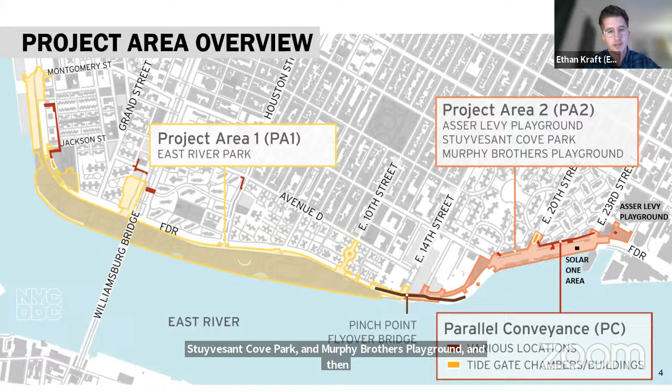Yes, we can. Alrighty. So tonight, just an overview, we are going to go through our PA1 and PA2 construction updates, and then we'll spend a little bit more time on parallel conveyance because that's the bulk of what's happening up in CB6. So just to give an overview again of ESCR, these are our 3 contracts under ESCR. Project Area 1 is the bulk of the landmass of the project. That's mostly East River Park. In Project Area 2, we have Asser Levy Playground, Stuyvesant Cove Park, and Murphy Brothers Playground. And then parallel conveyance is sort of spread all throughout the city, or all throughout this the east side. Just to go through some of the work that's happening on each of these contracts, in Project Area 1, again, that's mostly East River Park. We have a few closures in the park.

A couple weekends ago, on October 20th, we installed the Corlears Hook pedestrian bridge over the FDR Drive, and we have some pictures of that in a slide or two.

There's also ongoing utility work. We're continuing to fill the park in the portions that are closed, and we've opened ball fields 1 and 2. We continue to work on the Phase 1 Esplanade, as well as amphitheater seating and the tennis and basketball courts just north of the Williamsburg Bridge.

In Project Area 2, nearly everything is open. Murphy Brothers opened just a couple weeks ago, and we have some photos from that. It was nice to see a few members of CB6 there at that event. And all of our flood wall and floodgates are complete in Project Area 2.

Turning to parallel conveyance, this is spread all over the place. In Corlears Hook Park and Water Street, we're doing utility relocations and sewer installation. Water Street remains closed; we expect that to open mid-November. At East Houston and Delancey, there's more utility relocations as well as test piles, and Con Ed gas and steam work. Up in the CB6 area, we have utility relocations in both locations, as well as Con Ed steam work and ongoing test piles. I'll get into those things in more specific detail in just a little bit.

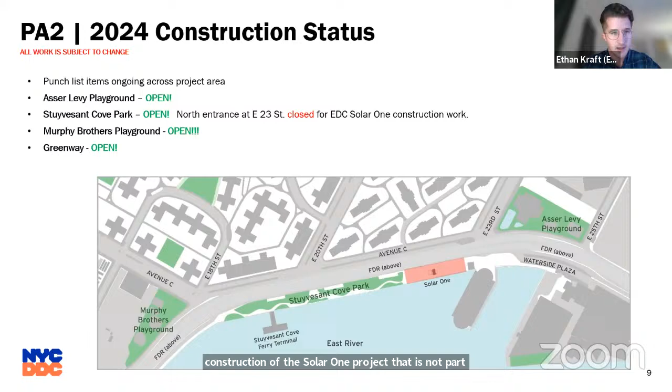In Project Area 2, this is just a map of the area. Everything is open pretty much. We still have some construction of the Solar One project, which is not part of ESCR, but it is taking up a portion of Sty Cove Park.

Murphy Brothers Playground opened to the public in October, and it's a really nice playground with lots of new equipment, new ball fields, dog runs, and basketball courts. Planting is expected to get underway for that park to add some greenery here in November.

The ribbon cutting and floodgate demonstration happened just a few weeks ago with the mayor. It was great to see folks from CB6 there and see the floodgates in action. It was my first time seeing it, so that was a very cool event.

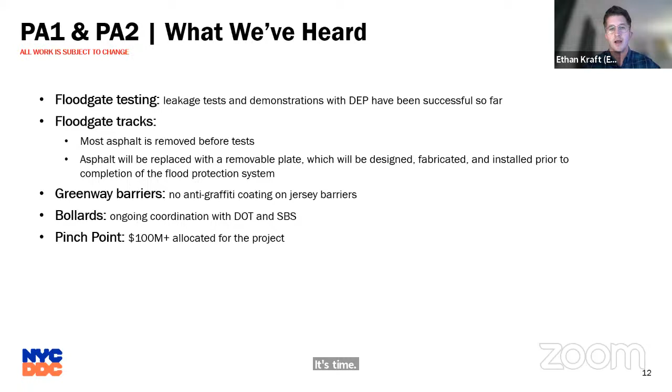Last time we had a few questions, particularly around PA2, so we have a few answers. We've heard that the floodgate testing is going very well with the Department of Environmental Protection, which will be the agency that operates the floodgates. I have more on that in a moment.

Within the tracks where the roller gates roll, sort of like a train, most of the asphalt for those tests is removed beforehand, and any pebbles or debris that remains get compressed into the gates because they're so heavy. Eventually, the asphalt system will be replaced with a removable plate, which will be designed, fabricated, and installed prior to the completion of the entire flood protection system, including PA1 and parallel conveyance.

In terms of the anti-graffiti coating on Jersey barriers, there is none along the Greenway, on the west side of the bike path as you're going north.

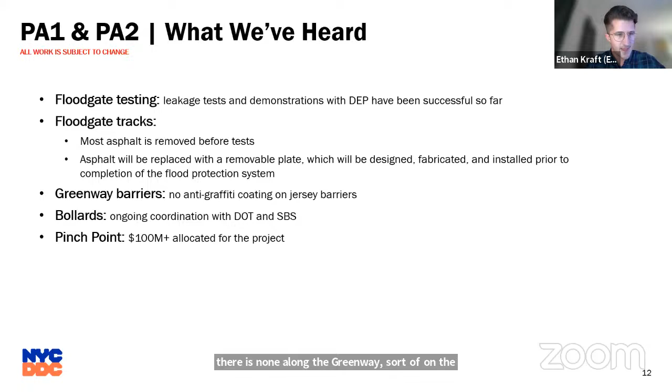And then the bollards — we were just looking at it today. We're coordinating with DOT and SBS to determine where bollards are going in the bike path, specifically near the gas station. I know there was some concern about cars driving in the bike path, so we're in touch with both DOT and SBS about that.

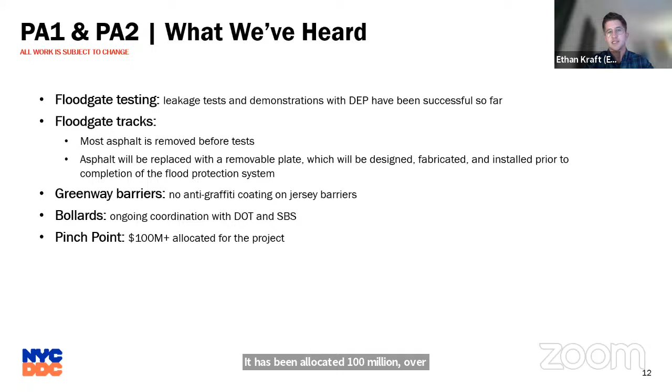There was also a funding question for the Pinch Point project. It has been allocated over $100 million, and I know DDC is hoping for procurement to begin in the months ahead.

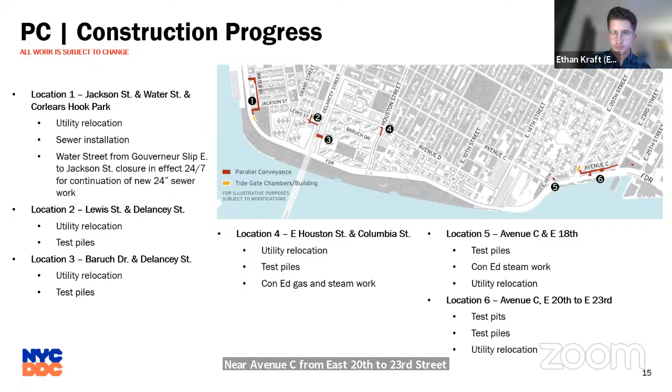So just to share a little bit more about the test pile work, we expect that to go on for approximately 4 more weeks. As they are installing the test piles into the ground, that can be a very noisy and dusty activity, so that is expected to wrap up in about a month. That's just the installation before they actually test the piles themselves. But the full operation from installation to testing is expected to take 4 more weeks.

There will be some weekend work at East 18th and Avenue C. We know that last time there were some concerns about East 18th being sort of a tricky intersection. We do have a flagger on site, and as work picks up there, the team will get traffic enforcement agents involved if necessary.

That test pile work is testing the strength. It's used to determine the capacity of the piles before they install permanent piles, which will be used to support the underground stormwater and drainage infrastructure. And that very deep and heavy sewer work is expected to begin in 2025. As we get a clearer view of that timeline, we will happily bring it back to CB6.

Just what we've heard for this contract, we got a lot of questions about the chamber building at the last meeting. The building itself will house just the controls for the gate and the chamber. The chamber itself will be accessed via a manhole or hatches that are mostly in the street. So 2 separate entrances for 2 separate things.

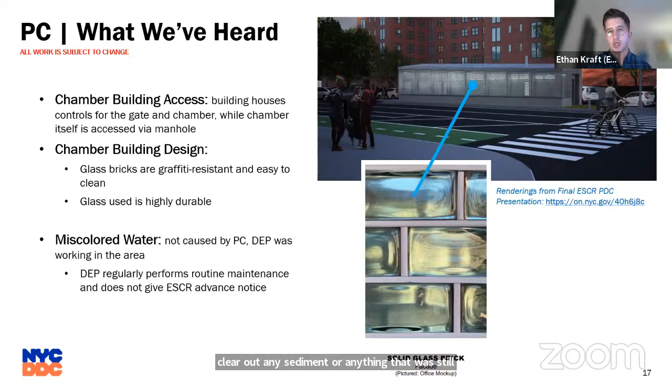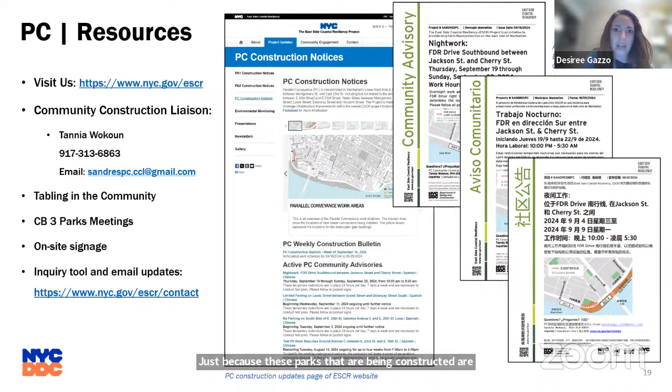I'll say that Luke Alicia from the Parks Department spoke at the CAG meeting and said some great things. One was that just because these parks are being constructed to the design approved for the East Side Coastal Resiliency Project, it doesn't mean that's the final design or the final way they'll be forever. He said there's flexibility with the Parks Department - they see how parks operate and how the community uses them. As times change, people use parks differently, so if there's a new need the community is experiencing, the Parks Department will work with the community on that.

I don't recollect if this was let under a design-build contract. Was it? No, it wasn't. So you had no part of the design, you're only doing the building. Correct.

The $100 million that's been appropriated for the pinch point - do we have any vision as to how that's going to be resolved? Any early vision? DDC is responsible for that project. It's a separate project, and they hope to come to the community, I think early next year. Any thought given to having that be a design-build contract? I'd have to have someone from DDC speak on that, so we can bring that question back to them, because that's a separate project.

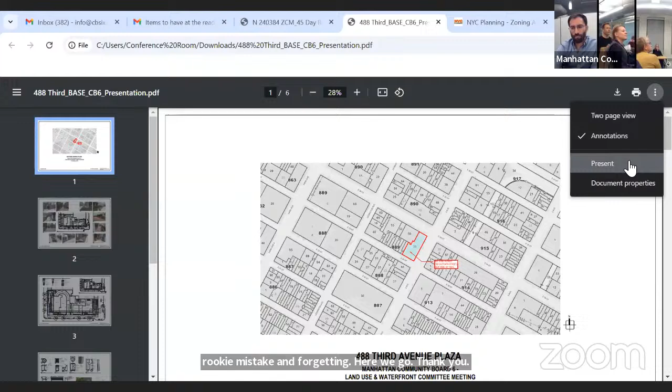There we go. We were basically wrapping up and saying that we're looking to make improvements to this space: improve the pedestrian access and circulation through the plaza, enhance the landscaping and seating, as well as provide for a new open air cafe design. I think from here, I'll let Carla take it and get into the details of the design.

Hi, so yeah, this plaza is located on 3rd Avenue between 34th Street to the north end and 33rd Street to the south end.

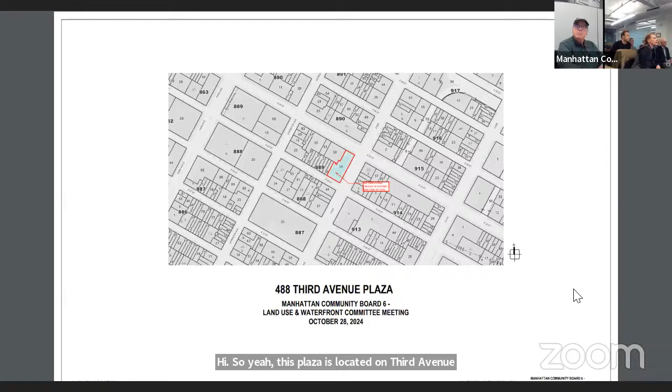If you want to flip to the next page, we can look at some existing condition photos. So this plan is showing Third Avenue on the bottom of the page. And if you go around starting at A, you can see that's the 33rd Street side. These photos were actually taken a couple of years ago. We've been in the process of doing this for a while, but it's kind of been a big eyesore on that block. It's gone through iterations of being empty, having COVID sheds, having lots of chairs and garbage and stuff. So that space on 33rd Street is kind of the reason we started going through this process. And you'll see in the design, a portion of that is going to become part of an approved cafe.

As you come around Third Avenue, it's a very tricky plaza. It's not a typical plaza. It's about 22 feet wide at the top of 33rd. As you head west, it gets narrower by the restaurant. And then once you hit Third Avenue, it's only about 10 feet wide. And we have grade changes going on, so it's a long period. When you're walking on the sidewalk, it seems flat, but it's actually inclining. So as you're going towards the west on 33rd, it's getting more sunken, and same as you're going north on Third Avenue, it's getting more sunken as well. So it's really narrow, there's existing brick planters that are very narrow, with some small openings.

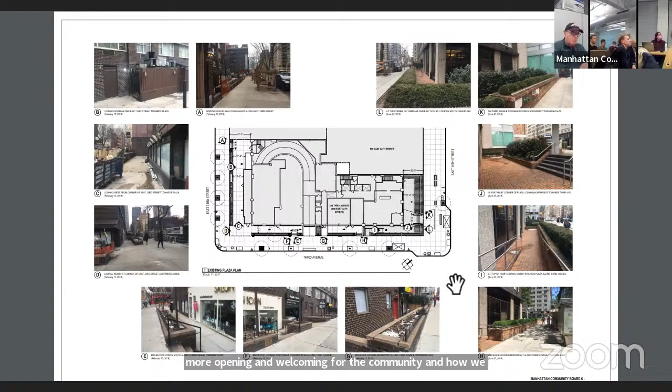So we can go to the next slide. There we go. I think back one. Which one? Maybe back two, I think. Too fast. There we go, whoa, we went the other direction. It's just taking time to catch up. There we go. No, you had one more. I think, hold it. It's taking a while to load.

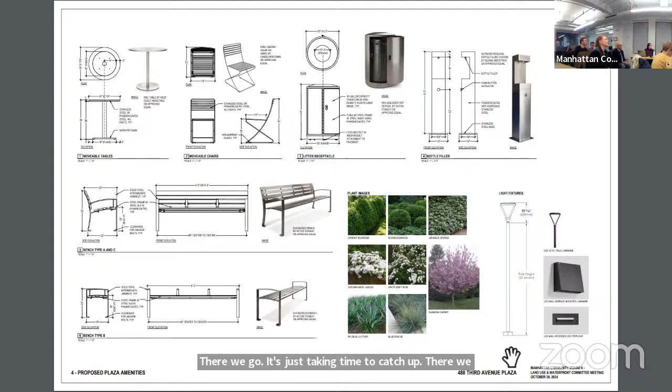Don't press it, okay. So this plan kind of has some arrows on it that show access paths and stuff that we're doing for requirements. So that's what the purple is that you see.

But basically what we're doing here is the corner of Third Avenue and 33rd Street. There's these two sections that are in blue rectangles. That is the designated cafe area, and that will have striping on the ground, the chairs and all the restaurant stuff stays within those two corners. There's certain regulations, it can't be more than a third of the frontage, all these sorts of things. We definitely worked with DCP to make sure it worked with the current plaza. And then that allowed us to make the west end of 33rd Street this pocket park that we're trying to do.

So the existing plan is in the upper right-hand corner. You may see there's a tiny staircase that comes down currently at the upper west side of East 33rd Street, 5 feet wide. We're making it 9 feet wide, and adding 2 other staircases as well. Again, we're dealing with grade changes, so we want to be careful. We have 1 step, then we break it and have 2 steps, so we're not having risers that change very quickly over one run.

We really try to open it up to the public. We put in all sorts of seating there: back seating, backless seating, bench seating, movable seating. We're putting in a bottle filler, a couple trash receptacles, and we're actually creating a big planting bed as well. One of the challenges is we have lots of skinny planting areas that don't give us enough room for trees, so this was an area where we could put enough soil depth and height to give a nice tree planting.

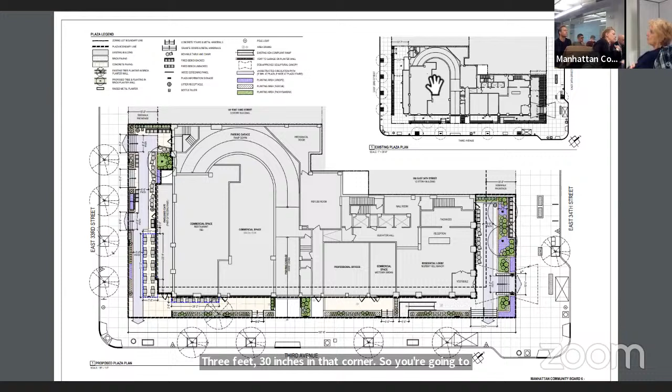Back to 34th Street, we are adding another entrance there. Instead of having that corner step that originally was there, which was a little unsafe, we're keeping the corner but keeping it low. One thing we're doing is getting rid of the high brick walls currently there, making it flush with the sidewalk up above, about 3 feet, 30 inches, in that corner. So you're gonna be up on the sidewalk, see planting, and it's gonna go down — a lot more visually connected into that portion of the plaza than currently.

We're gonna have a big wide open staircase added right there on 3rd Avenue. We're getting rid of the hedges in the planting bed on the 34th Street side and instead doing trees, so you'll have low planting now and trees you're looking through and under. We're adding benches up on the sidewalk level as well, movable seating and a bench. We're really trying to make it feel more like a plaza, because currently you'd never know it's a plaza — just part of it is the design from when it was done, but we're trying to do these things to make it nicer.

So you can go to the next page. I'm just showing some of the amenities, some of the different types of seating, some of the plantings.

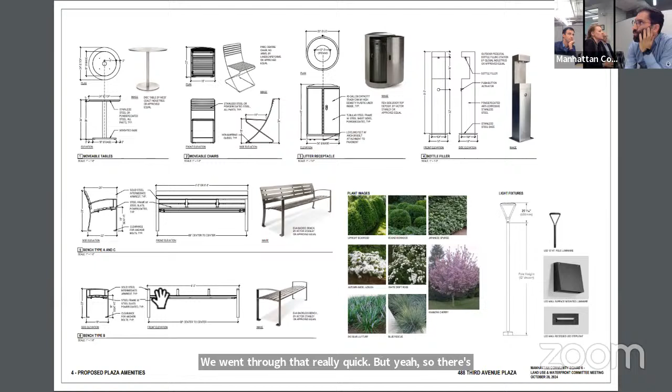We went through that really quick, but there's some plantings, a lot of evergreens, some grasses that are tidy and will kind of look evergreen as well, some roses and azaleas to give us some color.

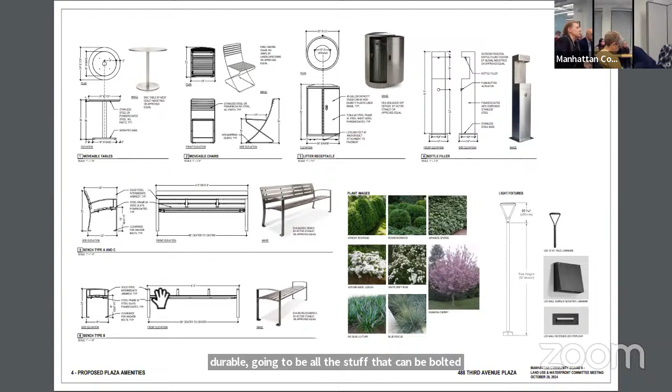And we've got a bottle filler, a trash receptacle, all furniture that's very durable. Anything that can be bolted down will be bolted down. The movable tables and chairs will be taken care of by the owner or the cafe proprietor.

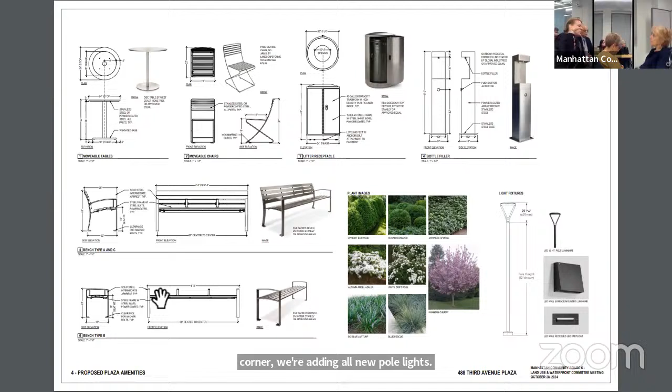And we're doing lighting. We're adding a lot of lighting to the plaza, you can see in the bottom right hand corner. We're adding all new pole lights that shine down. We have to be careful because we have our first floor of the building there, so we're very careful about not going too high. But we're adding a lot more lighting to the building: wall lighting, step lighting.

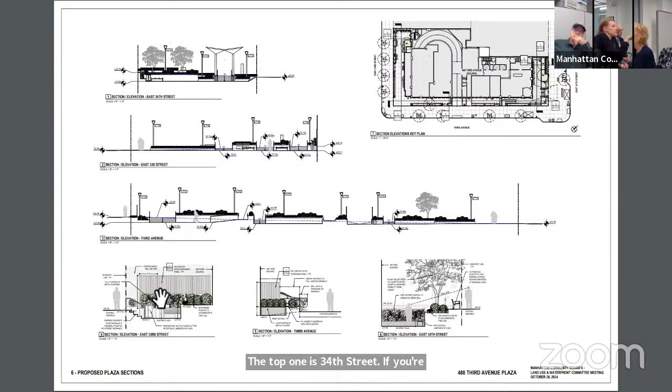There's one more page with section cuts through the property and a couple of details. The top one is 34th Street. If you're standing in the building itself looking at the streets, you can see the stairs going up and the plantings there, the lollipop trees and the low plantings. That's the backs of the benches on the street. So it's a lot more visual to the street than it was before.

The second section down is through 33rd Street. So this is the cafe side.

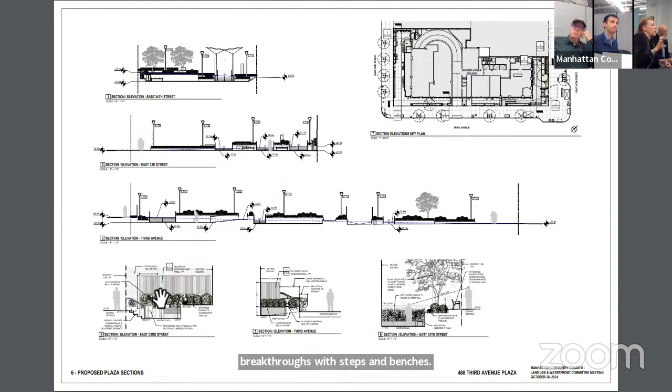So that whole area off to the left-hand side is where the cafe is going to be, and the right-hand side is where we're creating all these breakthroughs with steps and benches. And then the third one down is 3rd Avenue, just the whole long section of that with all the new plantings and light poles and things we're putting in.

And then just a couple of details of some of the new stairs and screening from the garage that goes in the block and all that sort of thing. So that's what we have.

I'd just like to say one thing on behalf of the owner: this has been a wonderful building for us at one level. It's a very successful residential building and we're very proud of it. It has unique characteristics brought up by the shape, because it's not a plaza, the building sits in the middle of a big open space where people build something around it, and we have a few of those, but this is kind of like a strip around the building, and it has a lot of people standing at 34th Street because of the bus and transportation.

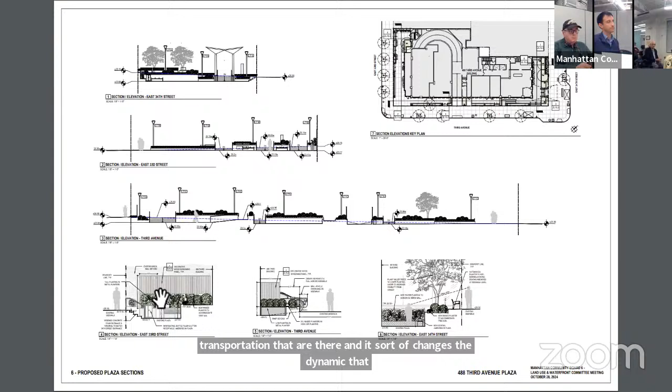They're there, and it sort of changes the dynamic so that the little benches became really big sitting areas for everybody rather than a planting. So we tried to design it to make it usable again as a sitting area, at the same time not someplace where people just sit around for whatever reason.

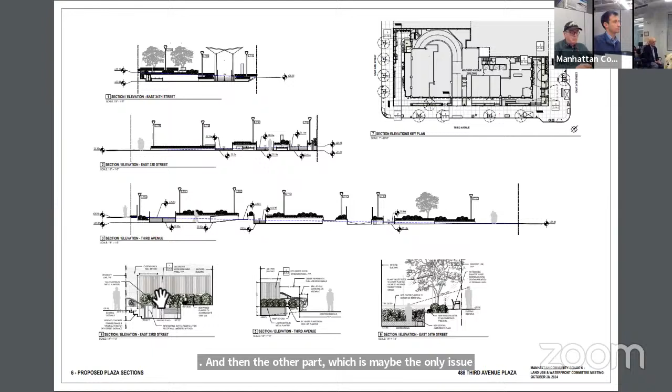And then the other part, which is maybe the only issue we've ever had with this building, is the southern part of the site, which is always to be a retail space, and it's been a restaurant almost since the day the building was built. And it's the kind of thing that's very hard for the building if we don't have a retail tenant.

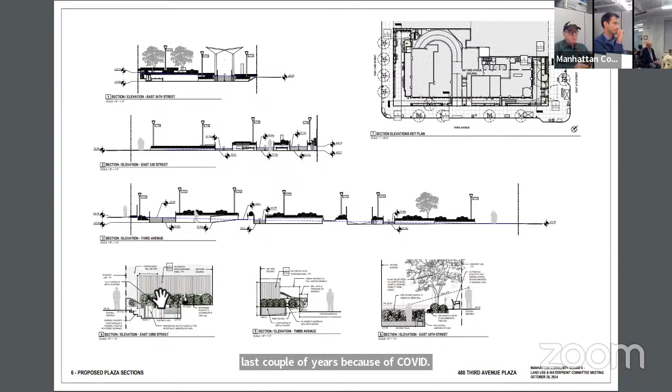We've actually had very successful retail tenants. Some of them have done it well, and some of them haven't done it so well. And this has been kind of frustrating in the last couple of years because of COVID. Real estate things have changed dramatically, especially for restaurants. And then our issue here of trying to keep it active, and COVID has stopped everything.

So what we couldn't do in the regular situation, meaning eating on the plaza - if people who've looked at this corner could remember, there was a tent not only over the plaza, but into the street as well. So it was a very successful restaurant, but I'm not so sure it was so successful all around, you know.

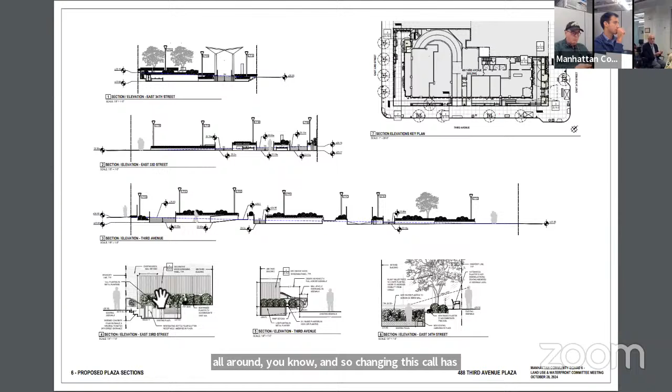And so changing this, Carl has done a terrific job taking something that's kind of really not seen as a positive thing and making it positive with the lighting and adding the seats and the color, and trying to make it so we have access on the plaza while conforming to the rules. This building was built before all of the regulations, and so what was good then - the idea was to make it with a little greenery around it - and then lots of things changed.

In the last 2 years, we were working with city planning, had to stop for COVID, and they were wonderful to work with and very creative. And Carl, I think we're very happy with what she did. Hopefully the community will see it as an asset.

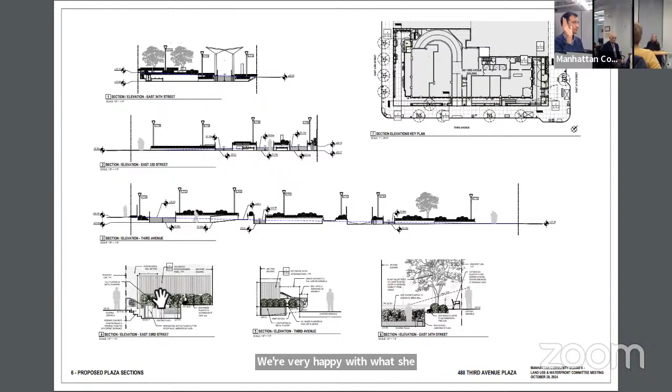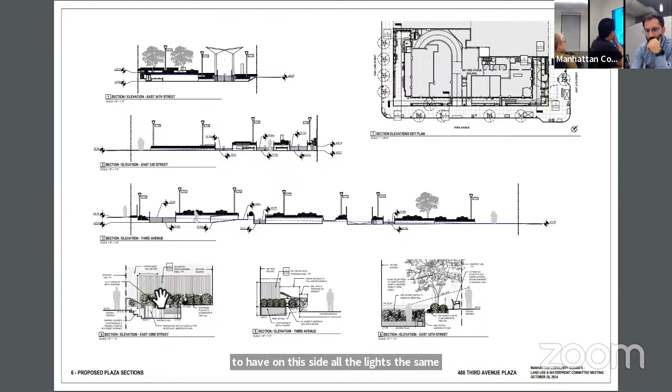It's a nice project. I only have one suggestion. You were commenting about the lights and the height of the lights. I would suggest, modestly, not to interject in the project, but to have on this side all the lights the same height, so the floor has the same impact. I don't know if that's possible, but that's one question.

That's what we have. Well, you can see the elevation. It's this one higher - higher, this is higher. Oh, because the ground goes up. Oh yes, yeah, they are different heights.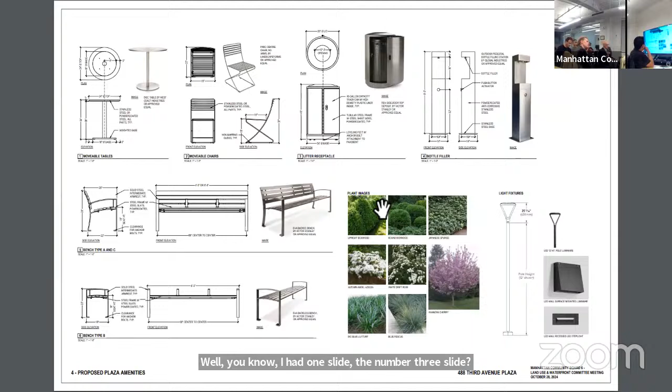And one other question I wanted to ask you: how is this not going to permeate the restaurant to the other? Well, if you go back to one slide, number 3 slide, yeah, the overall plan. Right? Okay, this is kind of - I know it. Okay, and got everything's okay, I just say. I got it. But this is...

The restaurant, the blue area. Blue area is specifically the restaurant area. And what we show here is just basically a sitting area, theoretical, because that's not the way it is, but they have an area so they can do it - 4 people at one table rather than 2 on each side. And what we have to do is provide access.

So the way it is now, it's a dead end. You come in here, and then there's a stair over here. It's just a big, long, dark space. I think this will help the issue, because frankly, the only issue we ever really had here has been homeless, and if there's nobody using the space, it just fills up with people.

So we have exit, entrance, and then these are public seats. As Carla was saying, this is sort of like a park where people could sit. And this is where the restaurant is, right in front of it. It would permeate them.

So this whole blue path that I see here — not the path, that's — this is all public. This is all public. And all here is public with a ramp.

When we talked about this originally, it was a little hard, because there were just stairs going from this side to that side and down. It was very inaccessible, but also very dangerous. So to simplify it — and this building, because of the challenge of the lower and higher levels — we had Richard Datner design a magnificent entrance.

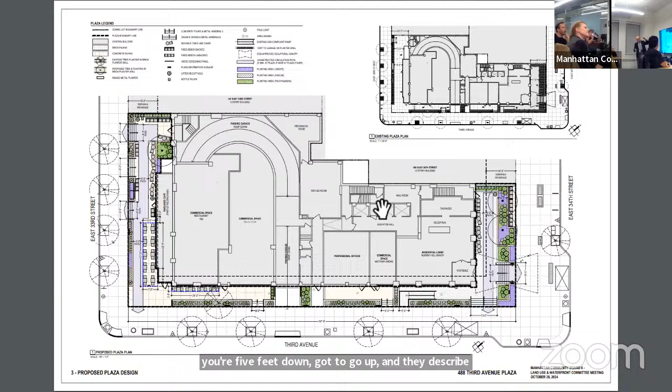I don't know if people like it. I thought it was one of the most creative things I've ever seen, actually. Because the POPS regulations consider a residential building on the same level as the plaza, so you make a canopy over the plaza. Here you're 5 feet down, you've got to go up, and the code describes that the highest end of the entrance is like at the second floor level — you can't really do that with this, so it works better.

How is the restaurant area delineated from the public area? Will there be a barrier? There's a painted line on the ground per the box line. The restaurant is signing an agreement — that's also the issue right now, until we have this agreement, we can have it so that we have it the way we'd like it as owners, and people would like to see it, and at the same time it'll be the law, so it'll be enforced. So that this part is their part of the restaurant — it's clear, that's the way it is.

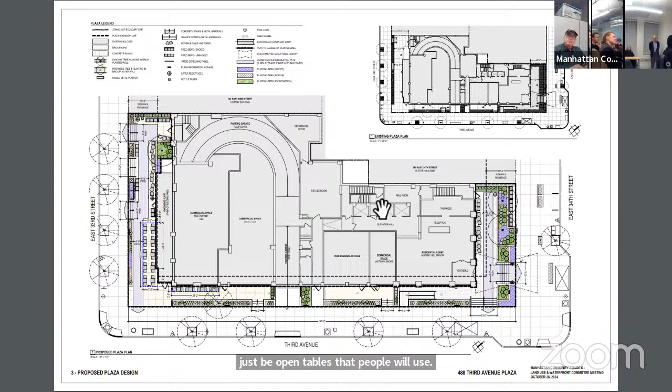There'll be place settings on the tables, whereas the other tables will just be open tables that people will use — just tables, no trash or anything from the restaurant on that side. Right now this is because the emergency egress is here, so it's kind of like the back of the building, but making it open space — the idea is not to have anything back there. It stays inside until the cleanup people come.

So can I ask a question — what is the number of seats? How many seating opportunities are there for the public in your entire plan? We don't do it by individual seats — there's 80 linear feet of seating, which is about 40 seats, which is 40 more seats than there currently is. We were balancing a bunch of things, like how many obstructions we can have in this plaza. So it was a balance of how much seating we can get in and still have our access around, and all these sorts of things.

I'm wondering, how come you're not activating, especially these areas in blue on the corner, and even the area in yellow just south of this, on Third Avenue? James, can you point out — right there, their access — how come those are not used for seating, knowing that in the past few years you guys had a number of DOB violations for using more than your allowable space for the cafe?

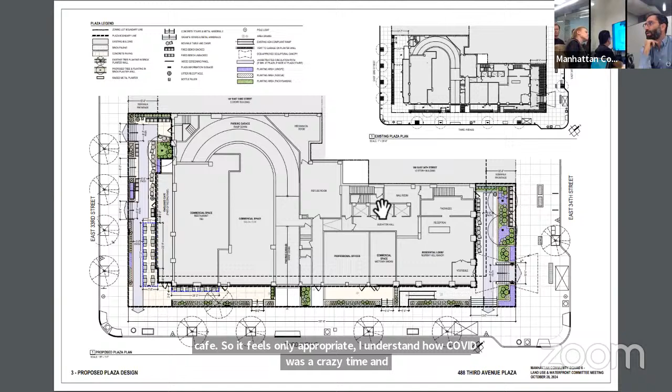So it feels only appropriate — I understand COVID was a crazy time, and I know from my own building it's not easy to operate a cafe. But now that you are fixing that, and it's very exciting, why are you not trying to maximize how much seating you can put in there? The purple areas are planting on that corner. Yeah, but they're not required — you chose to make them planting. No, we actually have to have a certain amount of planting on the plaza.

First of all, we have a separation of grade. The only place where it's actually flush is right here at this corner. It's 5 feet, or 4 feet at least on that side, about 3 feet as it goes, so we don't want anybody falling in.

And then the utilities in the building, we have fire hydrants and water connections, standpipes at different places. Originally it's like an infrastructure thing that they're there, so it's better to have them wrapped around with greenery than to have them standing in the middle.

No, but Majid is asking why these areas are not being activated with tables or other activities, which I understand their circulation to service the professional offices and the commercial space right in front of the stores.

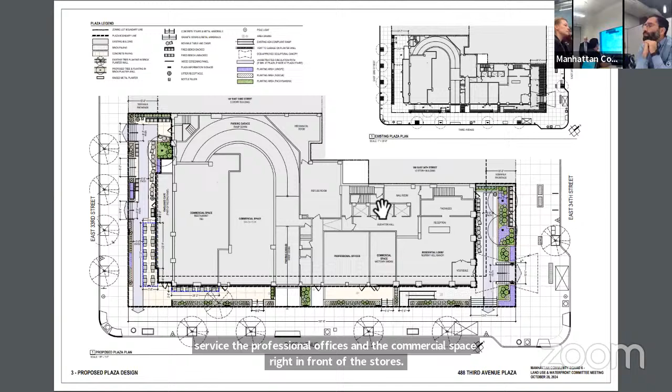But if you have an ice cream store, they might want to have tables outside, for example. That's a question. Movable chairs would have to be added to the certification. We've discussed all of this. If it works with an ice cream store, we'd have to come back and have a conversation about it. The way it used to be, at the beginning, back in 1970, I remember there was some seating there.

First of all, is there a storefront, is there glazing here, is there glass? Well, right now it's not, but it will be. It used to be 1, 2, 3, 4 commercial spaces. Now this is going to be converted into one big space, an eyeglass retail store, so basically there's going to be a storefront.

There's a dentist, I think, in here now - closed down, so they don't need chairs. It just seems like they don't have chairs, right? That's exactly right. This here is a spa or a beauty parlor, I guess is the way to put it.

And the operator of the restaurant is the same you've always had? No, we've had a lot. I hope not - some of them are better than others. This is a brand new restaurant. He started at the beginning of this, when we didn't have anybody, so we were doing it ourselves. And the fact that we had a restaurateur with us, we were able to discuss how he can make it work, because the idea is not to put so many regulations on him that he can't actually perform his job.

Is this the Medium Rare space? Yeah, Medium Rare. They did a good job. We think so too, so far.

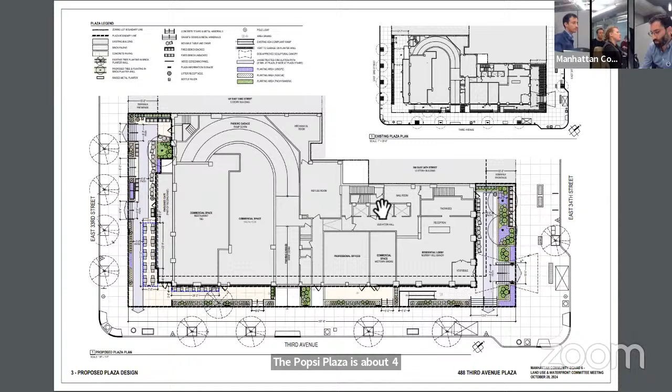Alec, do you want to? What is the square footage of the Pops and what is the square footage of the space that will be occupied by the restaurant? The Pops Plaza is about 4,800, 4,810 square feet. And the square footage of the space to be occupied by the restaurant? It's very small - it's 7.5 by 22.5, and then 24 foot 3 inches by 30 inches.

So does that square footage need to be reallocated or repurposed? Oh no, it's not a public building issue. The POPs regulations permit up to 20% of a plaza to be occupied by an open air cafe, and for that area to be privatized for the patrons. The policy behind it is that there's some benefit to attracting people in for services, food - it enlivens the plaza, it creates eyes on the street, so we don't have an empty space at all times. We're way under the 20% here.

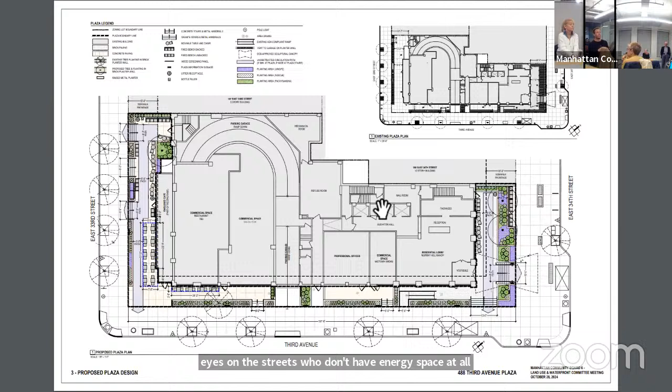When it's not in operation, those seats become open to the public, so there won't be permanent infrastructure? No, there's no permanent infrastructure - it's just a painted line on the ground. So for the on season, those seats can be used by the restaurant for customers. In the off season, anyone in the public can sit there.

Perfect. I think what's happened with the new establishment is that - my name's Michael Ann, by the way.

They did start to encroach on the space again, so we were all like, oh my God, is this going to happen again? But it's really nice to see this design, and I think it could be an inspiration for other public spaces.

I do a lot of greening and cleaning in the city, especially in our neighborhood, and 33rd Street is an eyesore. So is that wall coming down on the 33rd Street side too, where the large irrigation system portion is? Yes, we're breaking through it, that's all coming down. There's a little stair over here and access over here. We're still leaving slight walls for planting beds, but we're breaking through in a number of areas.

And what is the timeline on your project? Sorry, wait, let's go one person at a time. Jim, then we'll ask about timeline.

I'm just wondering, is this done in relation to the dining shed regulations? Was there a dining shed for that restaurant? No, it had to be completely removed. I understand, I'm just wondering, it was a little confusing. If you look at a picture a year and a half ago, there was a big covering on top of the whole plaza, a dining shed, and then out in the street, something else. That was the dining shed. So they don't have a permit for it? I just wanted to know. No, they didn't come for a permit, they didn't want one, they're really a sit-down restaurant.

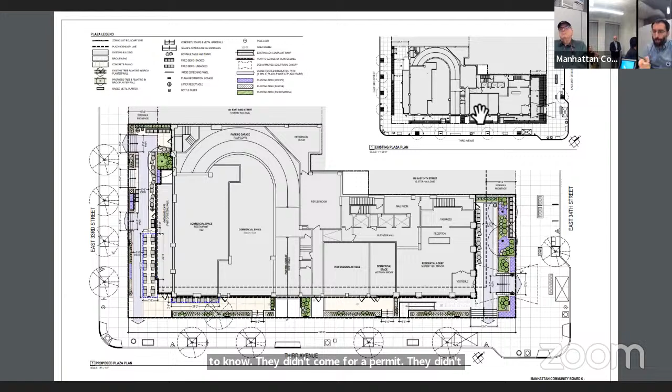I had a question about the ramp for ADA accessibility. In the diagram, something is blocking it near where the cafe would be—what is that, and why is the direction the other way? The ramp enters here, you come into the plaza as it is now. It's a planter, because the grade change is different—the yellow area is lower. So the ramp goes up alongside a planter, about 4 feet, for residential access. So where's your ADA compliance for the plaza, for the diners? That direction goes straight down the street—fortunately it's the only place that's at grade, everything else needs a ramp.

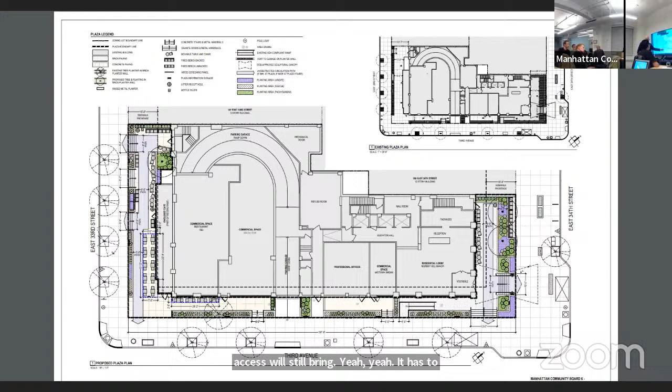Larry asked two follow-up questions on the grade separation, where you'll have that commercial space in the center on Third Avenue. What is the grade from the sidewalk to get into the retail space? From here at zero to the center, a little further in, about four. How do you get in there? Looks like there's a couple of steps. Is there ADA access to those stores? The way it works now, you go in the service entrance and can get into the back of the store—that's pre-existing. Will that change with this? No, because we're having a new store, but the access will still remain through that service entrance, because otherwise we'd have to take more green out. The ramp doesn't fit, that's why it was a little confusing.

Thank you. Okay, and then on 34th Street, could you go into a little more detail about the location of the public seats and their orientation?

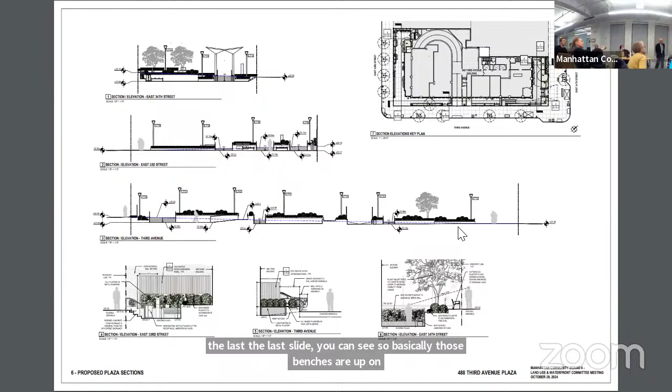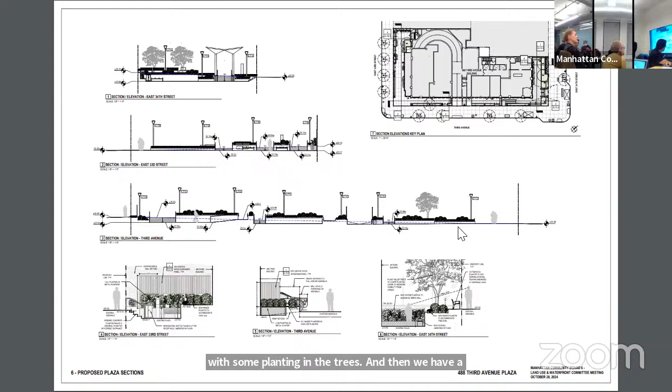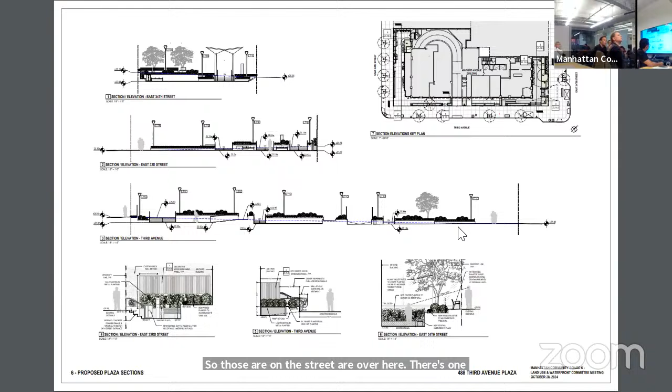There's a section of that area—if you flip to the last slide you can see it, the bottom right-hand corner detail. So you can see a person standing up on the sidewalk; there's a bench there on the sidewalk level, but on our property. Then it steps down slightly to a planter with some planting and trees, and then a larger step down at the wall to the building—that's the steepest part. Which direction are those seats facing? They're facing the street, and they have a back, so you're looking at the street. On the sidewalk there are some, and then down in the sunken plaza you have additional ones—those are movable. The seats on the street are over here, there's one bench facing the building itself, and then a couple of movable ones.

Okay, one more—go ahead, Jim. I just want to say, as someone who knows this building and is by there a lot, I don't understand how you fit all this in here—you really did it. We got some creativity here, these are very narrow spaces. Yes they are, it's a challenge.

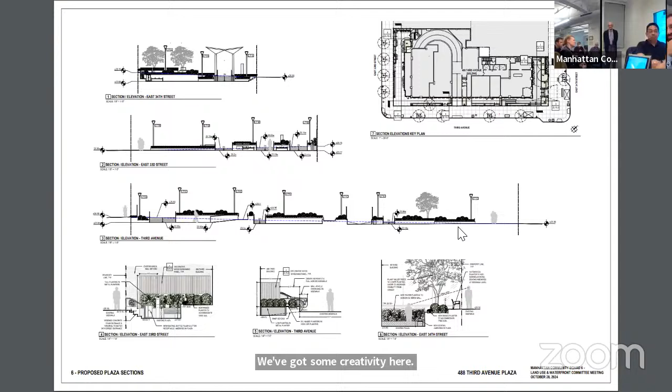Okay, can I do just one follow-up? You mentioned there's a required number of square feet for greenery. Do you know what that is?

20% is your cap on seats. What is the cap or the requirement for green space? I don't think we came to greater accordance with the current standards. That was something city planning thought was important, that we add more greenery. We don't meet the full requirement.

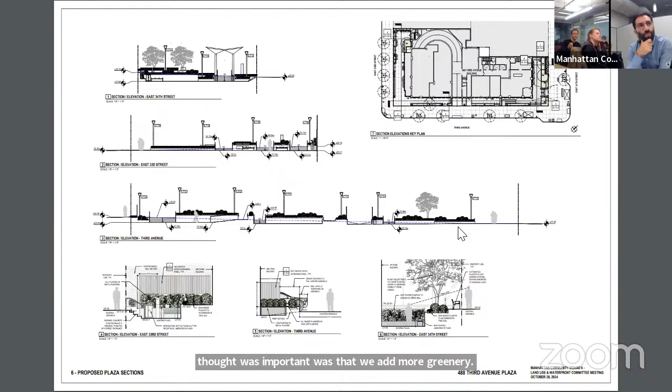There's not really enough space here and it would end up being too much obstruction. But maybe point out where new greenery has been added. I think mostly it's enhancement of the prior planter beds. If you go back to the overall plan, you can look at it versus the existing plan in the upper right-hand corner. You can kind of see where we really added extra.

It's really about right with what we had before with planting, because we're breaking through so many walls where there are planters now, to make these openings. So what we did is we came back with that big planter on the 33rd Street side, where there had been a shed and other stuff. That's one place where we were able to create a planting, this is all on structure, so this is one place we were able to create a high enough planting bed to get a root ball in there and have a tree.

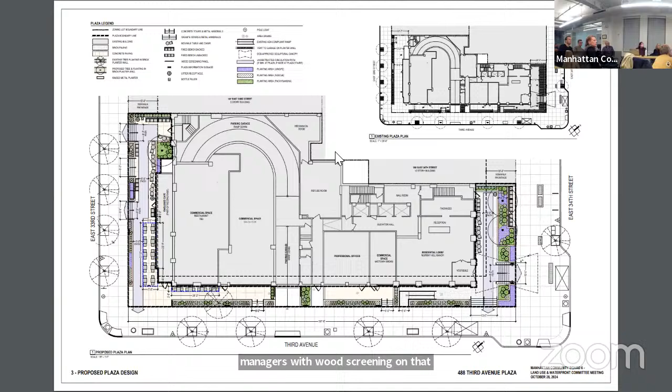And then we're doing all sorts of planting along that wall, the brick wall on the west end of 33rd Street. We're doing planters with wood screening on that brick wall to have vines grow up it to make it nicer. So that's one big place, along 33rd Street, where we're breaking through in certain areas. That was all about opening it up.

On 3rd Avenue, we were able to get a lot of planting in because we're keeping the planters that are there. We aren't doing as many breakthroughs just because there's not as much space for people to go hang out down there.

And then I think one big place that's made a big difference is on 34th Street. Instead of having these big hedges that they have in those current beds, we're really opening it up, putting in smaller flowering trees and lower plantings that allow you to see into the plaza more. Right now, it's very barricaded feeling with the hedges there.

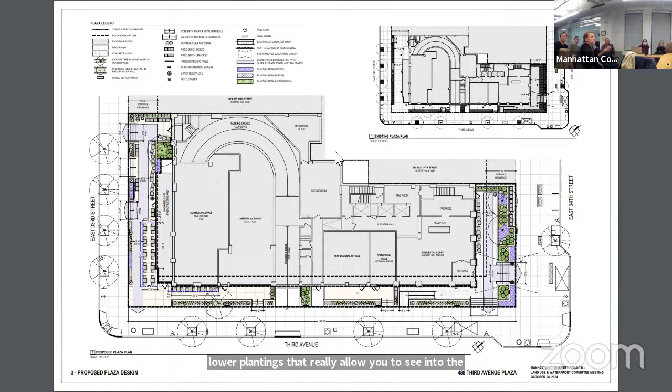And that whole corner with the raised brick planter that has all the metal edging on it, that's all gone. It's all going to be flush with the grade, planting it at grade, at the sidewalk level.

Yeah, okay, no it's only five. Go ahead, Jim. Sorry.

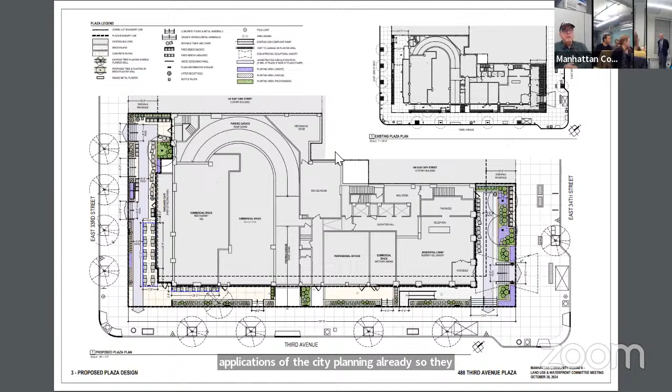I'm sorry, what is the request of your attorney and you of this committee and the board? If you can approve it, it'd be wonderful. All right, we're here to present, because we were invited to present, and you submitted the paperwork or you're about to? Oh no, the application's with city planning already, so they referred it to you because they have found it to be completed, ready for referral and discussion. Okay, so you're the owner, you're the lawyer, you're the designer. Got it. Is there any objection, anybody?

Actually wait, can I just ask, Ally or Aska, what's DCP's approach, knowing that this is a much older POPS application? What's DCP's approach to ensuring we're keeping within the limit of what's assigned here, knowing that it was raised to me, thank you to the office, that there was a number of violations in the past. So this is an exciting project, but what's DCP's approach to ensuring that we won't have a bunch of violations in the coming years?

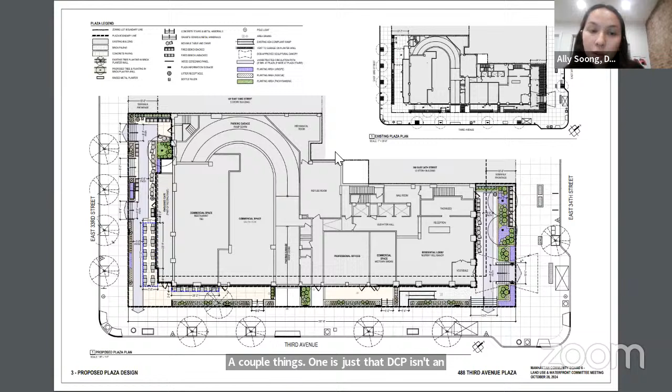Well, a couple things. One is just that DCP isn't an enforcement agency, so the Department of Buildings would be in charge of enforcing any future violations, and they were in charge of issuing violations in the past when there were issues with the plaza. But in terms of strategies for improving the plaza, as the applicant said, there will be lines delineating where the cafe boundary is meant to be, and that should be adhered to. And that will be part of the approval. They get this.

The application, just to be clear, is being referred to the community board specifically for the cafe approval. They're doing two certifications: one is the design change, which they've explained, and then the second one is this approval for an open air cafe, and that's what's being referred to the community board. So just to be clear about what you're approving.

But in terms of your question about how city planning sees enforcement in the future, really that is up to DOB. And also hopefully with more clear approvals for the space, because this plaza also has a mixed history of approvals dating back to the fact that it was a 1210 plaza, but it had some additional obstructions that weren't in the original approved drawings. Now we're formalizing what is approved in this space, and that hopefully makes it easier for it to comply with what is approved going forward. But that's up to the building and DOB in the future for enforcement.

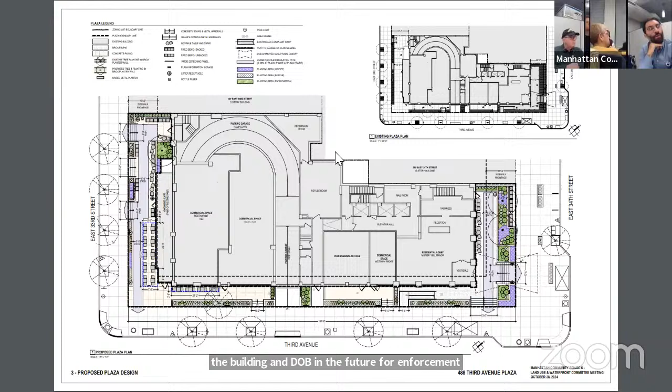Just to add a bit of comfort to that, Ally, as well. I mean, as you said, this has a very unique history. There's not really one set of plans that codify what is supposed to be there now. There was some acquiescence or acceptance by the city for the prior open air cafe. Over time, that became problematic and violations were issued, but there were some letters from city planning prior that acknowledged the presence of the cafe there, and to some extent tacitly approved it under certain conditions, and the prior operator didn't follow conditions, unfortunately.

Yeah, but nonetheless, what happens now, because we are in the current process, is there will be a notice of certification with the approved design recorded against the property that puts the entire public on notice what the exact design is that we present to the city planning and the chair presumably will approve. And from there, it'll be much easier for all agencies and the public to police the space, because now you'll have a very delineated plan that's available, recorded against the property and the land records.

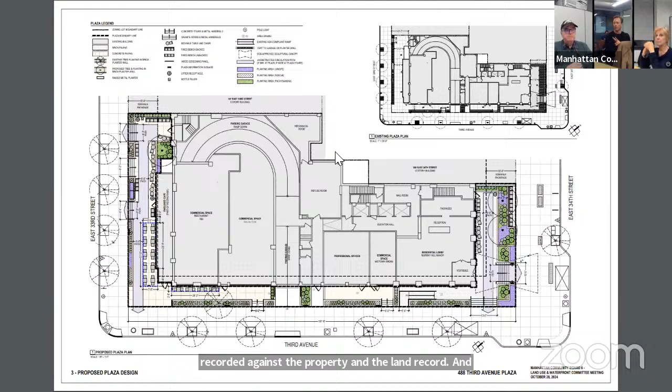And then the cafe is a separate approval? They're separate approvals, but the notice of certification will cover both of those certifications, and there'll be plans for the overall design and plans to delineate exactly what the limits of the cafe are.

And we sign a lease with whoever it is, right? And this is unique about this particular restaurateur is that he was listening to us as we're going, and occasionally there'd be a comment, this is not as practical as something else. And so I think we're gonna put it in, the clarity is, as Barack was saying, a big issue. We need our maintenance man to understand it, we need the merchant to understand it, and then the public to understand. Those lines, I think, have got to help.

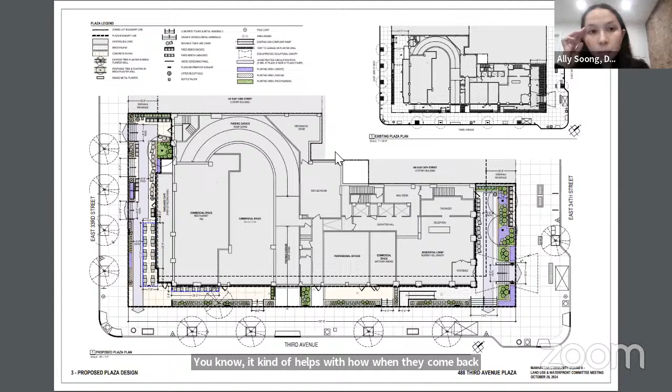I just want to also point out that one other important aspect of a cafe certification is that it's only issued for 3 years. So if they want to renew that application to continue to operate the cafe, they have to come back to city planning. That's another incentive for them to make sure they don't have violations throughout that 3-year time that they had the operational cafe. And it kind of helps with how, when they come back, we look at all those things as well. Yeah, they'll need to submit a compliance report when they're renewing their certification to make sure that they've been in compliance with the agreed upon plan.

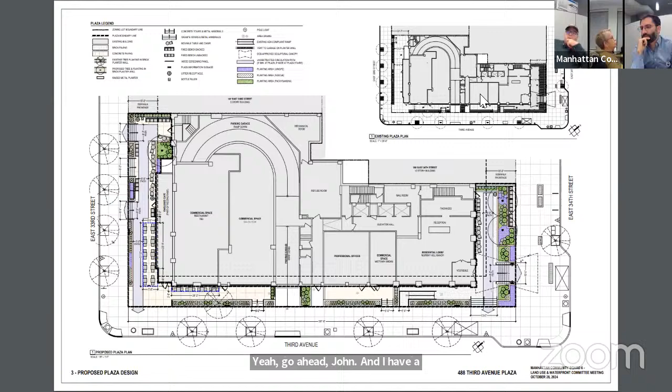Yeah, go ahead, John. Okay. And I have a question. But wait, let's have actually John. Well, Anne was before me, so. Okay, go ahead, Anne.

Yeah, I just have a quick comment and question. I'm glad to see you doing this work. I've spent way too much time at NYU Langone there and was never aware that this was a POPS. It just looked like a building, you know? So, but my concern is about the plantings. I was trying to read the names of the plants you're putting on there. I hope you are giving thought to native plants and plants that are bird and pollinator friendly.

And also given that we're in the longest drought since 1941, they are resistant to multiple types of weather, which if they're native, they are more likely to be.

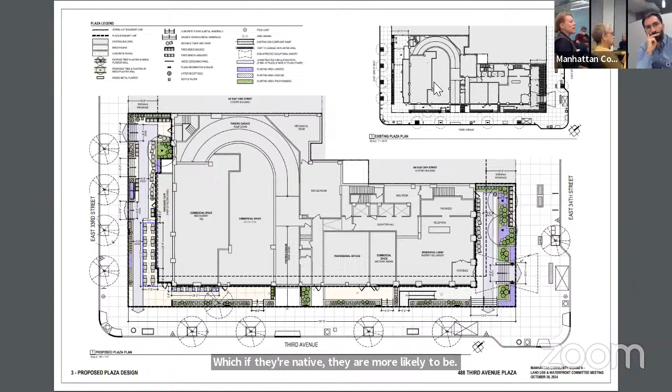Right, I always design with native plants, so I totally understand what you're saying. In this particular plaza, my design idea was to have about half of them be evergreen, because you need that structure for the 6 months of the year when we don't have it. And evergreen can be bird friendly too.

So I have some azaleas in there. I do have boxwoods because they're pretty bulletproof. We have the cherry trees that we're bringing back. And then I have a number of grasses, like fescue grass, and also some liriope, just trying to mix in stuff that I know can take a beating.

But certainly open to hearing everyone's thoughts on that. It's kind of a planting we'll do, and as plantings do, we'll see how it does, and we can always switch it out for other things. That's really the idea, trying to give it structure and mix in things that are friendly to the environment and can live in a tough environment.

Okay, we'll take one comment from the public. Go ahead, Elaine. Oh, John, did you want to say anything? Yeah, as long as committee members have all had a chance to speak, I'm not on the committee. Yes, yes, go for it, please.

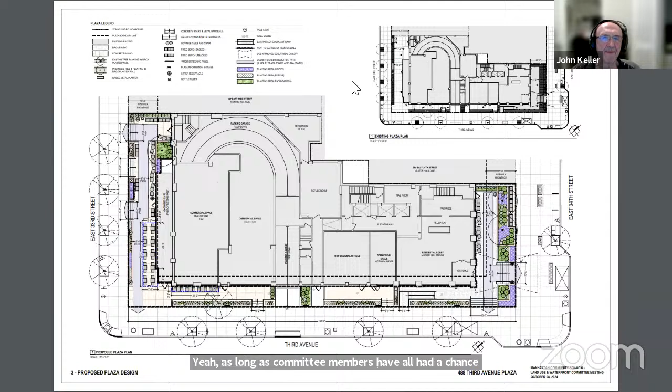Just to introduce myself, my name is John Keller. I'm a member of Community Board 6, on the Business and Affairs and Licensing Committee. This was on our agenda last Thursday, but at the end of a very long agenda. We didn't have the advantage of this wonderful presentation, but there were two things that came out from the committee informally, not by way of a vote.

The first was that we did understand the footprint for the restaurant is around 20%. In general, we'd rather see POPS remain POPS, but we understand that's not always practical. The second thing is that when the restaurant comes to us for approval of its license, we are going to be very concerned that this space is being taken care of in the way it's supposed to be, because of all the issues that have been here in the past. We're absolutely delighted with the commitment to fixing and improving the space.

But the restaurant should know we will be very specifically looking at that when we look at their license approval. The third was a smaller issue, but I think you've already addressed it: the signage isn't clear that this is a POPS space. You have to go look for it. But those were the three thoughts that came out of the committee.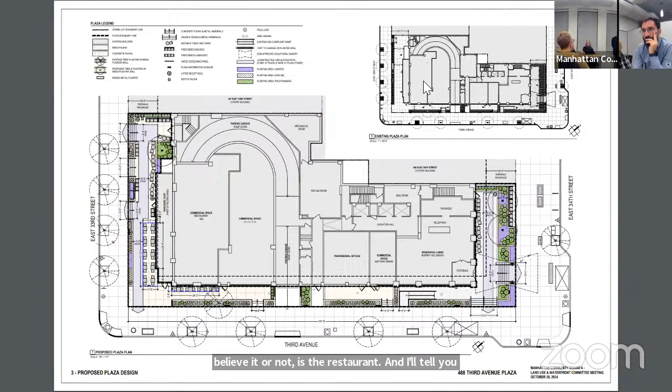And I'll tell you why. I have a very painful and costly experience with a restaurant in my building. I'm president of my board and it has been pretty brutal. So I'm wondering how much seating is within the restaurant?

I don't know off the top of my head. Do we know? I can find out. It's got to be at least maybe 20% more than the square footage area, whatever that is. It's on the Zoom, right? It's a big space. Does Dan know? Is Dan with your team online? Yeah, he is. I'd have to check and get back to you on that. I'm not sure off the top of my head. Dan's a senior vice president.

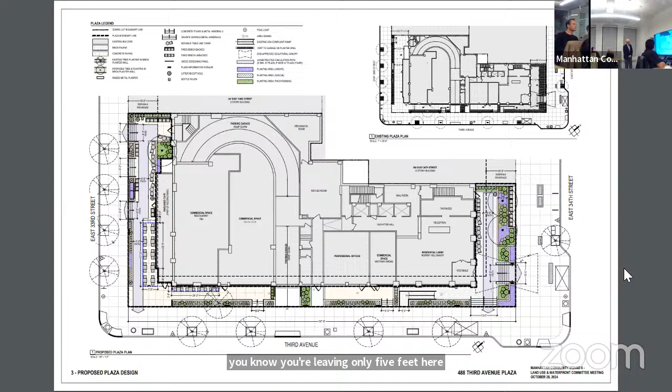I'm asking because you're leaving only 5 feet here, right? I'm 5 foot, basically. Well, this is for the path. Right, so now you have 2 rows of tables. We don't know exactly, Carla just laid it out. That's the maximum extent of the tables. That's just the area. I understand, it's such a narrow path.

Another way to look at this is to make it 4 feet against each side, and the line is still there, but there's no sitting on it. That's what I'm thinking, because what happens is you have people eating with only 5 feet between them and the planters, and it's a public space. So it's tight, I have to tell you. It's a tight perception.

We've had many issues with this, as you remember, because you had a prior operator. Restaurants don't always necessarily follow it, well, the difference is that we have clear regulations. Our issue here has been, even when they were good, we talked about this at the beginning, and we said they're opening up before we have this approval. If you went there when they first opened, about a month and a half ago, there was a certain number of seats. Now there's much more, because there's nobody telling them what to do, and we're not going to say yes or no until we have approval for this. I think what's really important to note is that in the past, the way it was operating, that entire space was occupied. Yes, well, this is precisely my point. And now it won't be, that's what this approval is meant to do.

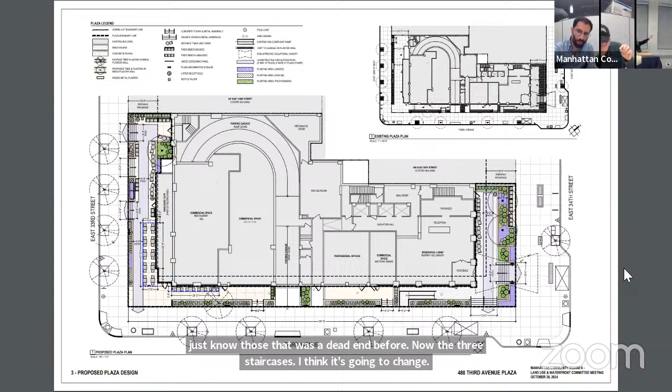And to note also, that was a dead end before, now there are 3 staircases, so it's going to change. But also you have additional sidewalk, so I don't envision people walking there. There may be more people going to the restaurant and the employees. There's no access to the space without having to go through that, unless you're in a wheelchair, then you do have accessibility.

Can you speak one at a time? Sorry. That's the only wheelchair accessibility. Right, that's why it was very important for city planning to be exactly 5 feet wide, so that it would be clear for access.

Okay, sorry to interrupt, and I totally understand, some of that is just code, so as long as they're following it. Gabe, you had a comment?

Just real quick, to get to the essence of the issue here. I love the beautification. If your tenant should violate the POPS regulations, will you commit to holding them accountable so we don't have to? Of course, that's the idea. And sometimes the landlord tries and it doesn't work. Tell me about it. So you go to the DOB. It's not so easy. Tell me about it. Well, that's the reason for the lease. I like the going to 3-year thing, it's a very good thing. Everybody gets it, exactly, we don't mind that. We have rules that are clear and they make sense. We should use them. Simple. Okay, go ahead, sorry, one last thing.

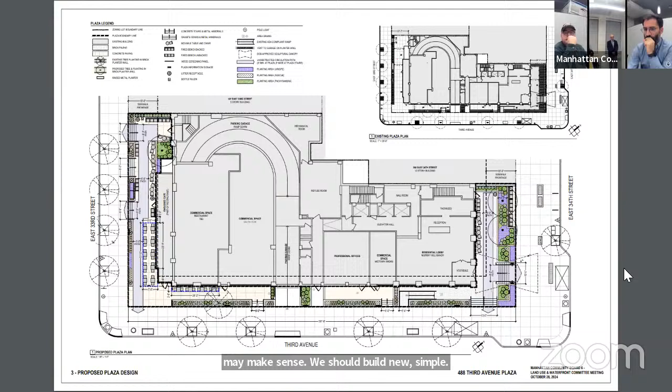Having been on POPS that are in front of good buildings, good ones, kept away by a doorman. This starts to look very specific to the residential portion, and I'm just a little concerned that it becomes essentially a de facto private garden to the residents.

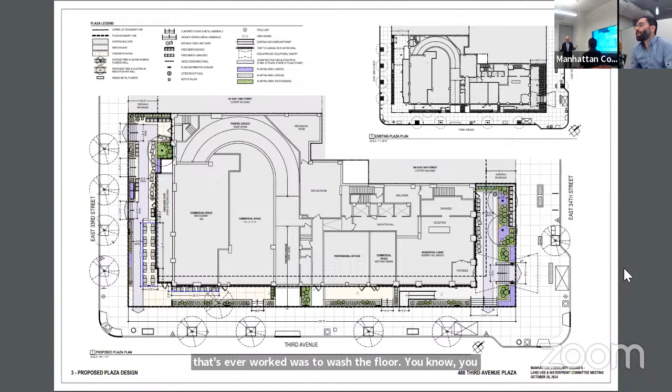Well, right now there is no seating, and I think the idea is our doorman will know that somebody's sitting there, and just sitting there and not loitering there or doing something that's okay. In fact, if we put chairs out there now, it would be okay because the doorman is standing right there and he goes out. If things get really bad, the only thing that's ever actually worked was to wash the floor, everybody's got to get up, and so they get out. Otherwise, I'm short of calling the police, and this is not a very hard thing for the police to do unless somebody's really doing something bad. So it's a tough people thing that you have to kind of work out.

You're correct, it's a very challenging space to make inviting to the public because of how narrow and shallow and low it is. I think what Carla did very successfully was, it used to be visually impossible to even see into the space, because all the hedges were so high it felt completely private, you wouldn't even think to walk in. Right, it's more of an operational thing, as long as the doorman are involved.

Everybody's afraid who's gonna go down there because they think bad. It's important for the public, so try to create space, those seating opportunities for the public there. And also important to have those seating opportunities on the sidewalk side, knowing that some of the public may not be inclined to walk down the stairs and go in, there is an amenity there that people can use.

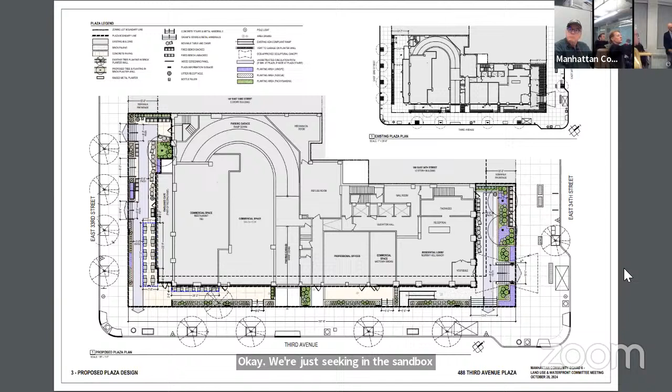Where are the seating and the sidewalks? On 34th Street. Yeah, it's just on 34th Street, on the other side of those two trees.

Okay, so a quick check just for ourselves. Business affairs and licensing passed this on to us. We have to comment, there's a 45-day referral period. The next time business affairs and licensing meets is on November 21st. Full board is on November 13th. So we cannot send it back to them. We have to vote on this.

We have to put together a resolution which can reflect some of our concerns. And I'll just say very quickly, the position that I'm hearing from folks is that this is a great benefit for our district, we need this, this is exciting, great for your building, great for all of us. We just had research done here that shows close to 40 POPs in our district don't comply. They come and say the right things, then they don't comply. DOB is very overwhelmed, so they don't even issue them violations. So just so you see where our concern is coming from.

So with that, I'm gonna recommend, but I'm gonna let you speak. No, I'm of the opinion that we could probably approve the redesign of the plaza, and then you could go resubmit to business affairs and street activities for the approval of the cafe. I think it should be bifurcated.

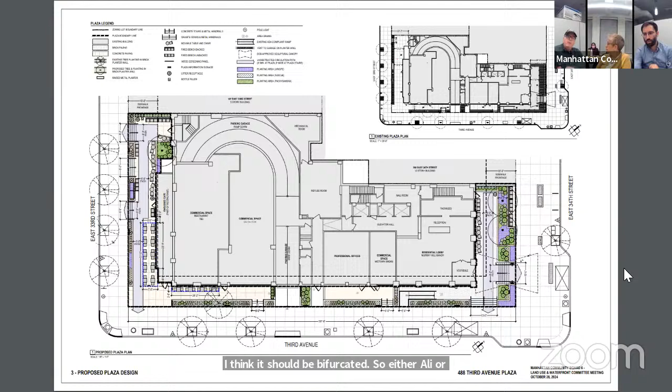So either Ali or Aska, can you confirm if that's actually how things work for this? The community board is only approving the cafe. The cafe, or the plaza, or the design? The cafe certification that's temporary for 3 years, that's the one that has a requirement for referral to the community board. The design change certification is going at the same time, but it's not actually what the community board is approving.

But Aska, is there anything else you wanted to add? I thought we had to approve the redesign of the plaza as well. For public plazas, technically when you do a design change, the zoning resolution does not require that to be referred to the community board for consideration. But when you're doing an open air cafe, the zoning resolution does. Yeah, no, that I knew, I thought we had to wait. Design change is not the same as the redesign, technically not, because we've done it before for zoning. We've done approvals of redesigns.

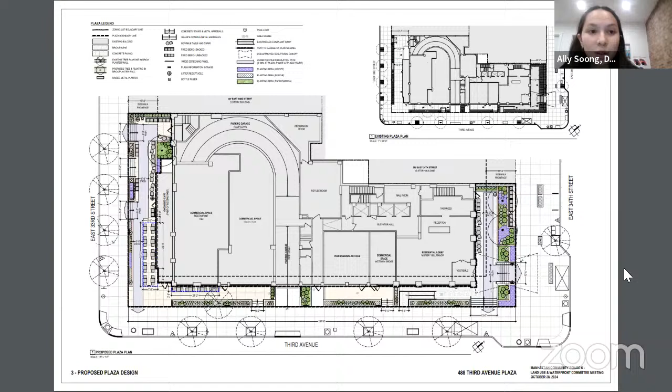But let's hear from Ally, then other board members. I'm not sure if this is what Barack just said because I couldn't quite hear it, but when we're doing an open air cafe certification, oftentimes we require that there's an improvement to the design as well, as part of allowing the open air cafe to come forward. So as part of that, oftentimes the applicant will show that they've made an improvement to the design when they're showing you the cafe. But the thing the community board is really approving is the cafe certification, that temporary certification for 3 years. Got it, thank you for the clarification.

And is it possible to have the current tenant attend the next board meeting? Well, I guess we could ask them if they want, but I don't think they know. But you know what, it can change, it is gonna change, it's how we have it in our agreement. And I think they're gonna say they're gonna do it, because that's the way we had it, and they started out saying that. It's just that we couldn't, because as Barack explained, it was very different than this year. You can come in and use it the other way, it's sort of a dead space.

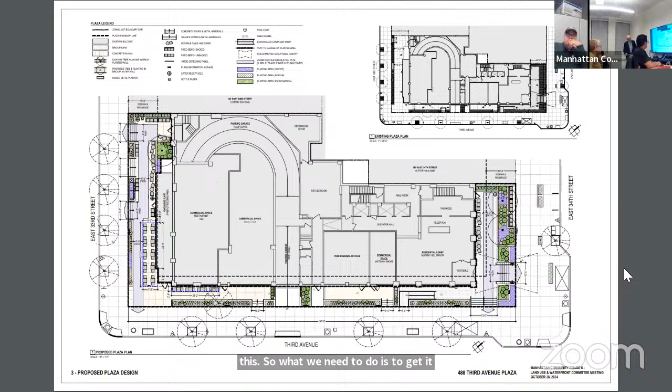It just goes to, and so right now there's no pressure, and so they're using it. I think if we tell them this is a real thing, they can start changing it. We just gotta get it approved, and then we'll make all the changes. I am pretty sure they will conform. I don't think we need them to come and say we're gonna conform, they'll say that anyway. But they have to, or there's a big fine if they don't. The law is on your side, we're on your side.

I just want to note they're an established company with multiple locations in multiple cities, and they have a restaurant in New York City.

I can jump in and answer that. The group is a large group from the DC metro area. They've got, I believe, 8 restaurants already under operation, continuing to open more. They're a very established group with quite a lot of expertise, and they've done outdoor seating as well. So they have definitely got the ability to conform and run this properly.

Thank you. Brendan, you had someone? Yeah, as the committee decides which direction to go here, one thing to keep in mind, speaking of the 45-day time period, is that the deadline for us to respond, if we have a response, is December 2nd. So any comments we have, if any, on this application need to come before the full board in November, because December 2nd is before December.

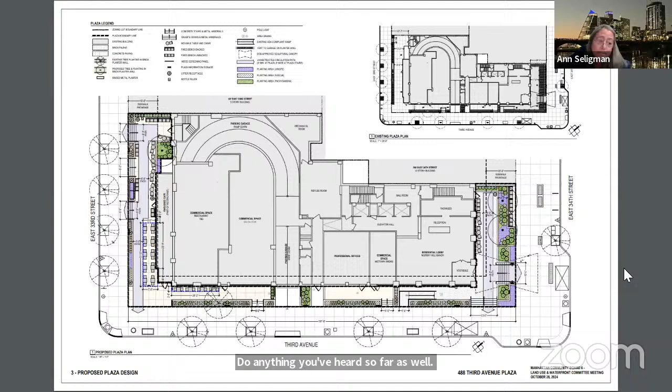Is there objection from the members of the Business Affairs Committee online to anything you've heard so far? No objection from me. No objection for me. John? We didn't take a vote. The only concern was that the space be taken care of as it's supposed to be taken care of.

I would move then that we resolve to approve the application as submitted, as stated. Is there objection? Second. Jim, is it a support or no objection? It's a no objection. And I'll second that.

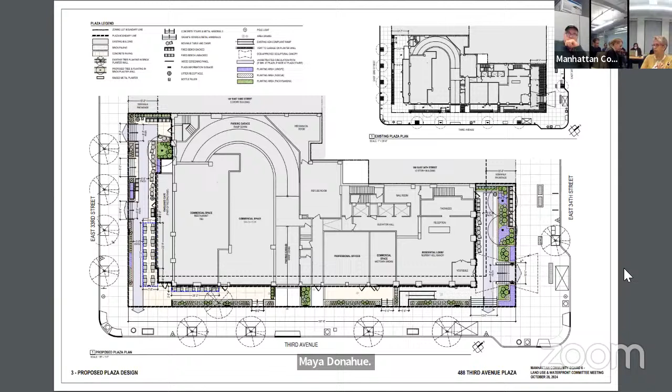Okay, roll call. So when I call your name, please say whether you are in favor, opposed, abstained, or not entitled. Majid Abdul Samad, in favor. Tanya Arias, in favor. Victoria Benatar, in favor. Jim Collins, aye. Maya Donahue, in favor. Alice Militic, in favor. Rich Mintz, in favor. Larry Shire, in favor. Letty Simon, in favor. Susan Steinberg, in favor. Gabe Terzo, in favor. And James Vera, in favor. With all 12 committee members in favor, this passes.

We do need someone to put the resolution together. I recommend that we list in the whereases some of the concerns that were mentioned: the encroachment of the restaurant on the public right of way, about disabled access in all directions, and about access to the seating on the lower level. And we should also mention that DCP has weighed in and shared their perspective, so when the full board votes, they know that.

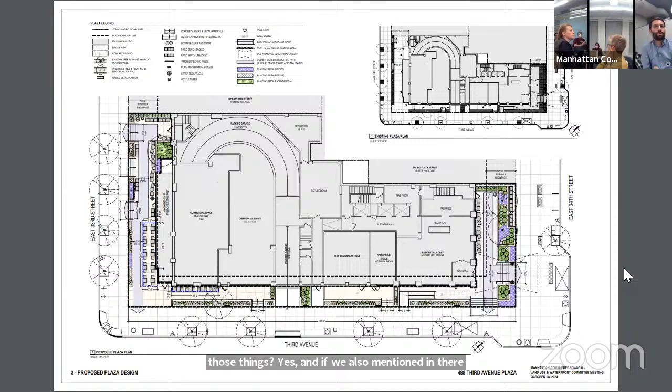I understand, okay, I can write it. Thank you so much.

Perhaps the Business Affairs and Street Activities could caucus before the full board meeting, just to sign off. Do we have anything else? Okay, that sounds good.

Thank you for coming, thank you very much, we appreciate that. I'll refer it to Anton. I would certainly have no problem. Okay, I'll refer it to Anton, but I would have no problem. Please pass back to the restaurant that we're happy that they're there. I've been there twice. As long as they don't have to come to the meeting, I think they'd be very happy. This is good, I have their contact. Okay, yeah, thank you. All right.

So the rest of the meeting is going to run faster right now, mainly because Gabe and I had originally committed to have an interactive exercise to talk about the water club. We were ambitious and didn't get as much work done before this meeting as we would have liked, so we're going to tackle this next month, but we want to give a quick update on the FDR.

If you remember, especially for new board members and new committee members, the board had commissioned a study on the future of the FDR that put together an initial vision that was put up for a vote. The full board voted on it, I think it was unanimous.

Since then, we've been taking it to share with our elected officials. We presented it for the Borough President to present to the Borough board. We are right now working with Jesus and Brendan on CB 3, trying to present to CB 3, 8, and hopefully 11. We're trying to get on the calendar of other elected officials to present that study. Our goal is to try to get funding so we can advance it and elevate the discussion about the future of the FDR. Is that an accurate summary of where the FDR is?